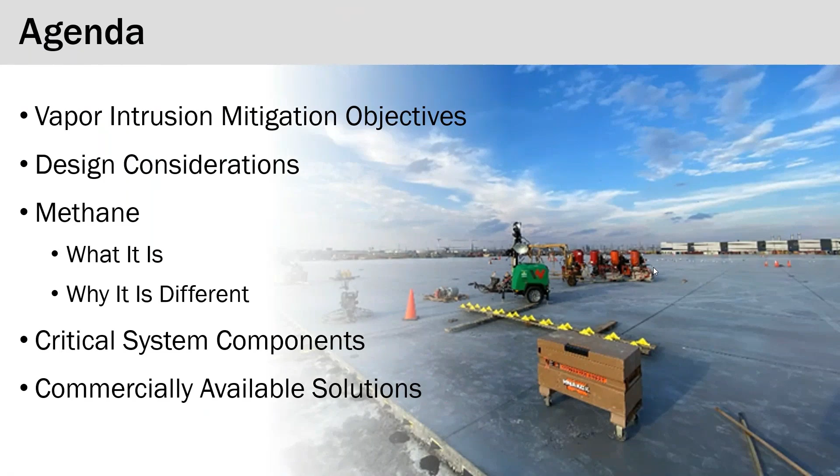We'll look at typical design considerations, and then jump into the heart of the conversation—how methane is different than typical VOCs or radon that might be mitigated, and how we design differently for methane, looking at critical system components. Finally, I'll hand it off to Ryan, who will talk about some commercially available solutions in this space.

So when we're looking to design a vapor intrusion mitigation system, the main objective, obviously, is to protect indoor air and be protective of human health. That's the main objective. But while we're doing so, we also want to consider a few other things, namely constructability, adaptability, and operability.

We could design the best system in the world, but if it can't be constructed, what good does that do us? Similarly, we want a system that's able to adapt with changing site conditions or changes in the building footprint, whether that be during construction or post-construction as part of tenant improvements.

We certainly don't have a crystal ball, but using some best management practices to design systems that can allow for a lot of the most common things that may happen during construction or post-construction. And then finally, operability.

We want a system that's easy to operate, one that's intuitive, and one that allows us to adjust system performance as may be necessary based on changing site conditions. And we're looking at all of this throughout the process of the design, from pre-design through installation.

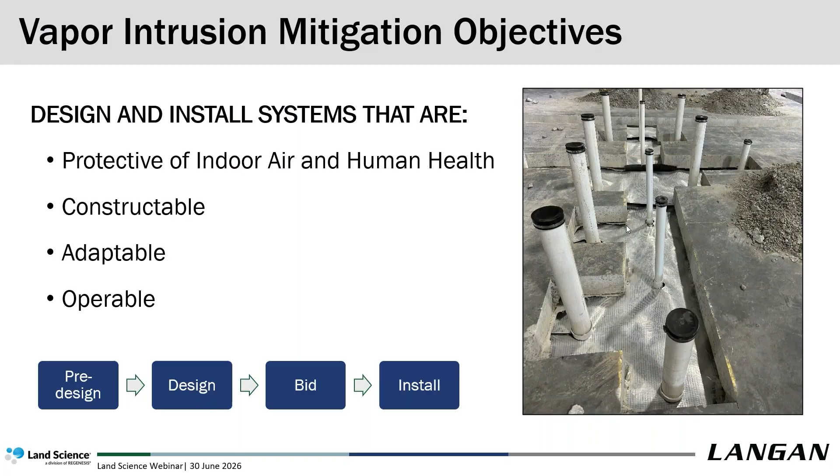When we're looking at designing vapor intrusion mitigation systems, we're looking at several different potential strategies. These strategies can consist of blocking, venting, pressurizing, flushing, or purifying. This is sort of a crude way of describing it, but I'll run through these quickly.

We talk about blocking. It's a physical barrier to vapors making their way into the building, that being vapor intrusion barriers. When we're talking about venting, we're looking at more traditional passive or active sub-slab mitigation strategies where we're preventing or mitigating those vapors from making their way into the building through either passive or active modes of depressurizing the sub-slab environment.

When we talk about pressurizing or flushing, we're looking at ways of modifying the existing or new HVAC systems. Pressurizing means we add a positive pressure to the interior of the building. So as an alternative to depressurizing the underslab, by pressurizing the interior we're mitigating the ability of those vapors to make their way into the indoor air. You could also consider flushing, increasing the air exchange rate within the interior of the building so that we're not allowing any vapors that might make their way into the building from accumulating at a level that's dangerous to human health.

And then finally, air purification is more typically seen in a temporary condition, while a more permanent mitigation strategy can be put in place, but it's still an effective way. This means we're not necessarily preventing vapors from making their way into the building, but more so purifying that air, assuming those vapors are present, creating safe air for the occupants to breathe.

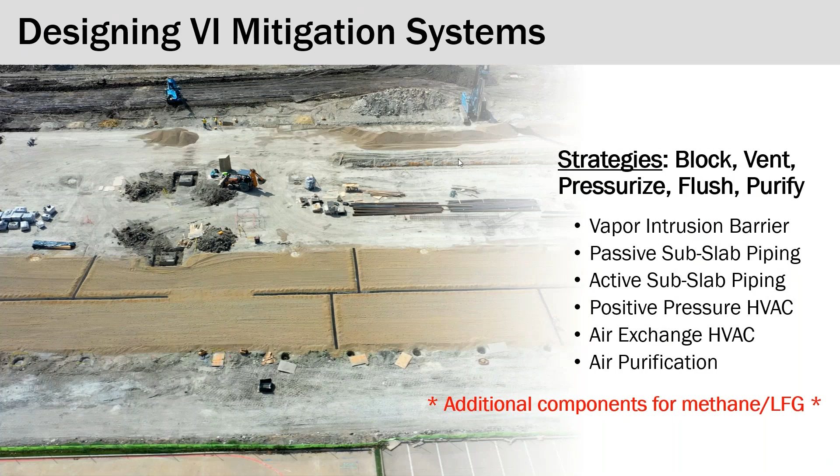Now, these mitigation strategies still apply in the case of methane mitigation, but as we'll talk about in more detail in this presentation, there are certainly additional components that need to be considered when designing a system for either methane or landfill gas mitigation. So again, these considerations are not specific to methane mitigation systems, but mitigation systems in general.

First thing we're going to be looking at are site conditions, and those consist of a number of different things, namely contaminants of concern and the magnitude of those contaminants, in addition to the depth to water. There are a number of other things that need to be considered, but these are the main things at least at the preliminary look. I've got contaminants of concern highlighted here in red because we're going to be discussing one contaminant of concern in particular today, that being methane.

We're also looking at building type and use, in addition to size, looking at the site plan and understanding: is it a cut site, is it a fill site, and how those construction activities might impact the site conditions, contaminants of concern, and the potential for vapors to migrate into the building.

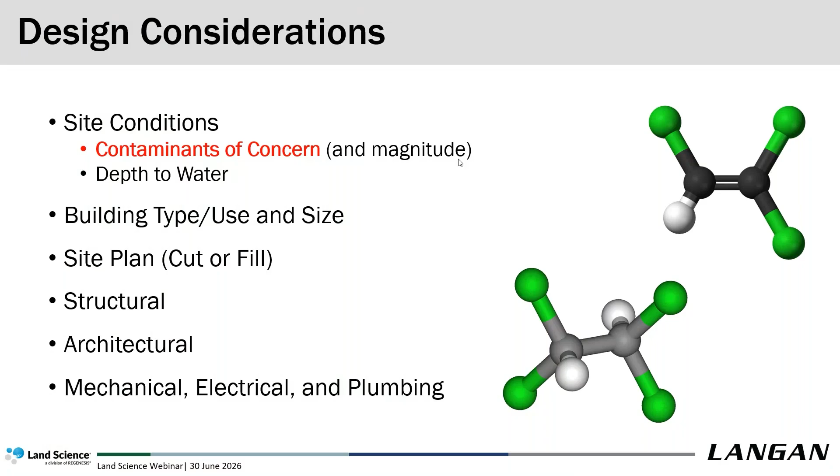We're also specifically looking at the structural, architectural, mechanical, electrical, and plumbing for the building that's to be mitigated. Our mitigation system needs to be designed in conjunction with these elements so that it can be constructible, adaptable, and operable. We want a system that's not going to impact the aesthetic or the functionality of the building we're mitigating. So now that we've run through some of the baseline considerations for mitigation systems in general, I want to jump into methane, talk about what it is and why it's important, and why we're talking about it today.

Methane is a colorless, odorless, and highly flammable gas. The lower explosive limit for methane is 5% by volume, so not a huge concentration. The upper explosive limit is 15% by volume.

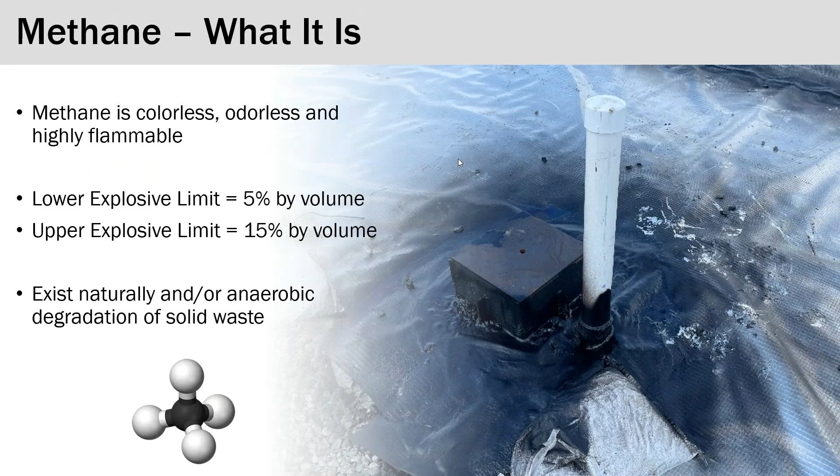Methane can exist at sites either naturally, through naturally existing organic matter such as meadowmat, or through the anaerobic degradation of solid waste in the case of landfills in particular. These are the most common sources that we see requiring methane mitigation systems in land development applications.

So why is methane different than a typical volatile organic compound or radon? One reason is the acute health risk, which comes in the form of the potential for explosions or fires. If methane is present between 5% and 15% by volume, and you've got oxygen, which I would hope you'd have in the building, and you've got an ignition source, you have yourself the potential for fire and explosion.

In addition, as I mentioned earlier, one of the potential sources of methane in land development applications are landfills. And with landfills comes the potential for settlement.

That comes with itself a set of challenges that need to be considered when we're designing a mitigation system. And in the landfill application, there's a potential for other gases or constituents to be present as a result of the landfill, not just methane. We have to understand how those other compounds may impact the functionality of the system and what other precautions need to be taken.

The other thing to consider is that when we're designing a system for radon or other VOCs, our primary objective is to prevent the intrusion of the gases from making their way into the building. However, with methane, there's a supplementary objective, which is to prevent or mitigate the accumulation of methane from beneath the sub-slab. Reason being, we don't want methane to accumulate beneath the slab to a concentration that could be dangerous from an explosion or fire risk.

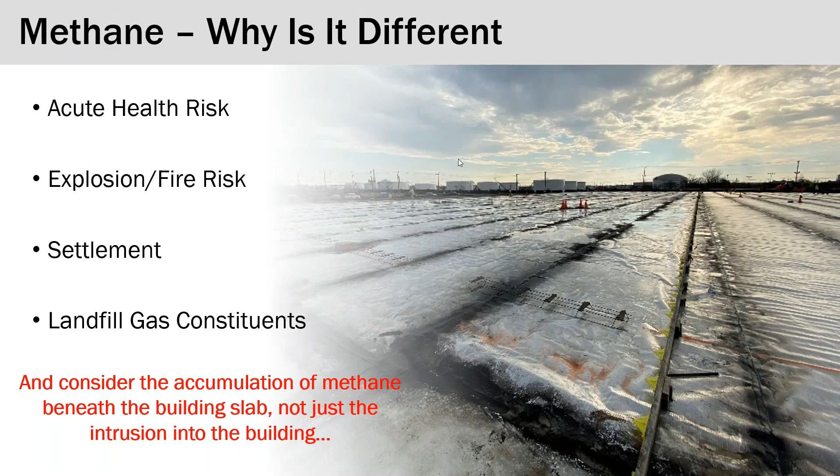Consider in the future if someone were to perform tenant improvements and penetrate the slab, if concentrations of methane beneath the slab were within that 5 to 15% by volume, it could create a very dangerous situation. So, same objective as a VOC system, which is to mitigate intrusion, but we've got that supplementary objective of preventing or mitigating the accumulation of methane beneath the slab.

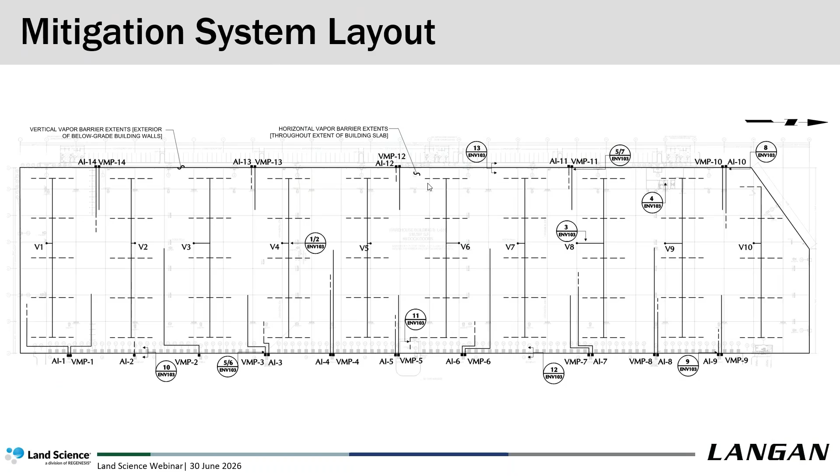As we walk through those critical components, we'll also look at some of the lessons learned when implementing them. I've grouped these critical system components into a couple of key considerations, and we'll walk through these on subsequent slides.

We're looking at the potential for methane gas to migrate, whether beneath the slab or across the site, the potential for settlement, the acute hazard that methane presents, and how we monitor this effectively. And finally, materials of construction—looking at not only the constituents in the gas itself, but also the potential for settlement and migration, and how that factors into particular materials of construction used.

As we'll see on subsequent slides, there's a site-specific basis for all of this, as is typical for any mitigation system. So I don't want to give the idea that all of these components are necessary for every methane mitigation system designed, but I'll do my best to identify instances where they need to be considered.

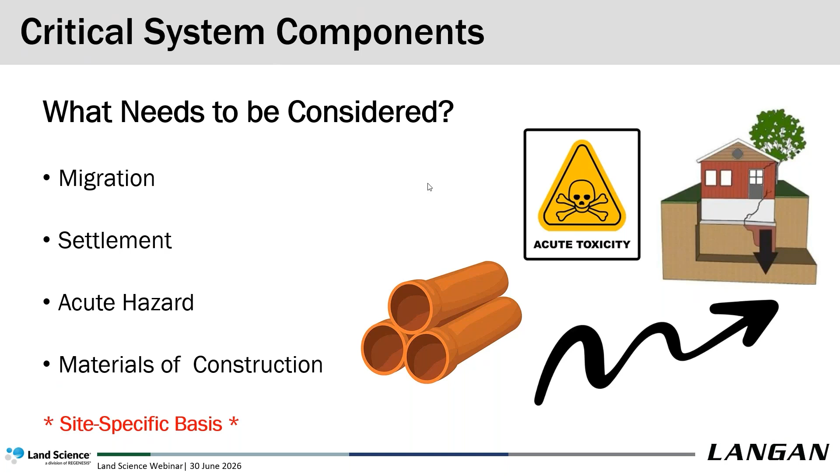The first consideration we'll look at is migration. Similar to VOCs, there's potential for these vapors to migrate beneath the building or across the site. The difference is the acute health concern that methane presents, so it's important that we mitigate or control the migration of methane throughout the building or across the site as much as possible.

Two such components that we typically include in our mitigation system designs are trench dams and seal-off fittings. For trench dams, the idea is that if utilities run across the site, they're typically placed in a high permeability bedding material as part of the utility design. That high permeability bedding material presents a preferential pathway for those gases to migrate.

Particularly when the methane present originates from our site, we want to be mindful that these utilities don't present a preferential pathway for methane to leave the site. Especially in cases of landfill redevelopment, there's a concern that if methane were to use this bedding material or these utilities as preferential pathways, methane could accumulate offsite and people could unknowingly be introduced to elevated concentrations of methane in a dangerous environment.

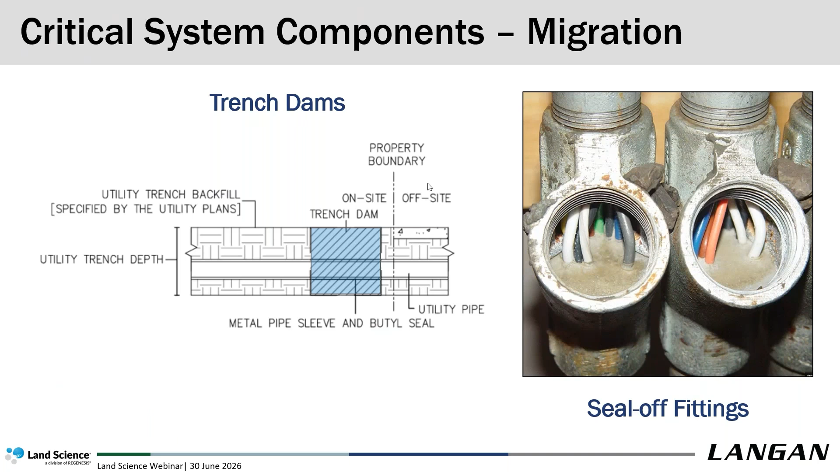I will mention that these are not typical components of a mitigation system. So it's very common, if not discussed upfront with the entire project team during a kickoff, that these items are overlooked and are much more difficult to install after the fact, keeping in mind that while people may be familiar with installing mitigation systems, they may not have seen these elements. Identifying that upfront as part of the process is very important.

The next component to consider is settlement. This is typically associated with land development applications where landfills are present, and it needs to be coordinated with the geotechnical engineer and structural engineer to understand the likelihood or possibility of settlement, and the magnitude of settlement that's anticipated.

But if settlement is anticipated, there are several things that can be included in the design to allow it to continue operating effectively post-settlement. A couple of these include pipe hangers - elements installed prior to pouring the slab that become integral to the rebar and hang in place. So as the slab potentially moves, so too will the piping, preventing potential pipe damage, or to the extent it can, sloping or low points in the piping.

Also, there are flexible joints that can be installed along with different materials of construction. Typically we would see PVC pipe used beneath the slab for a typical mitigation system. HDPE pipe is another potential material of construction that has a bit more flexibility, and will mitigate the potential for pipe damage if settlement were to occur.

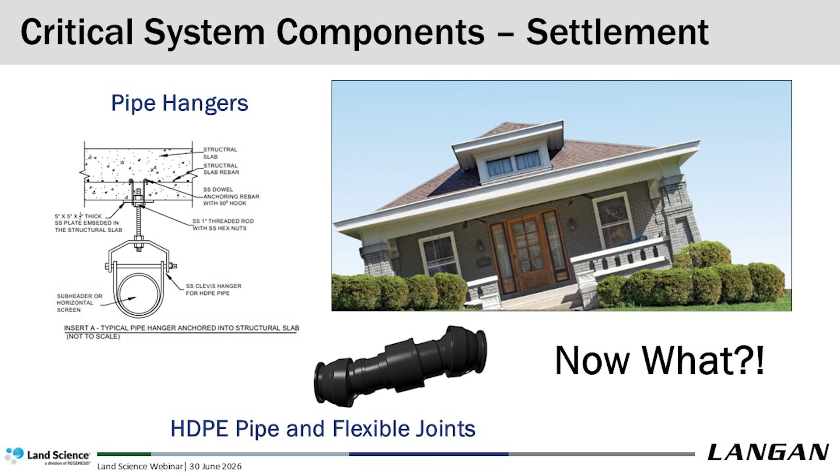The next consideration is acute hazards related to methane. As I mentioned, it has the potential for being an explosive or fire risk. Some ways we can mitigate this, we'll start with indoor air sensors. This is certainly different, not part of a typical VOC-related mitigation system. We would like to think our mitigation system is going to prevent dangerous levels of methane from entering the building and accumulating. However, we want to be sure we're protective of the occupants, and if something were to go wrong with the system, that we're made aware of it. So indoor air sensors are a crucial part of a mitigation system targeted for methane.

These sensors are installed approximately a foot from the top of the ceiling, because methane is lighter than air and will accumulate at the top of the building or ceiling. We typically include several set points to allow us to understand where the concentrations of methane may be and allow folks time to make necessary adjustments to be protective of indoor air. Also, when we're talking about an equipment room where we might have equipment for an active mitigation system, we're typically looking to have a separate HVAC system for that particular room.

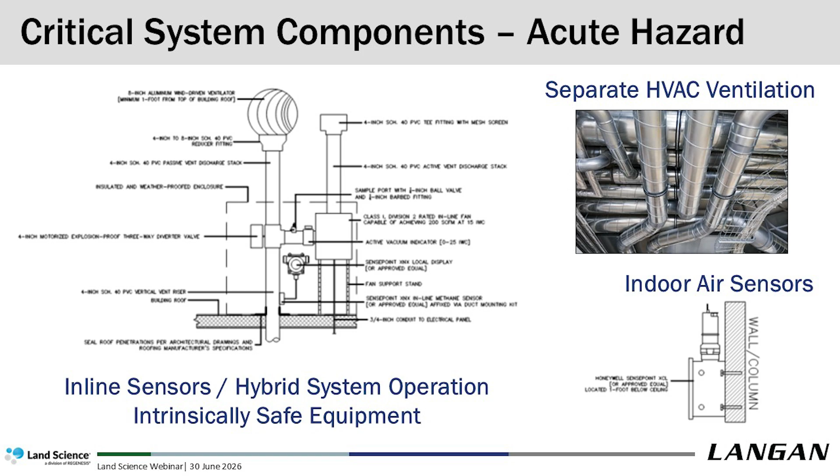Also, whether a hybrid or an active system for methane mitigation, the equipment needs to be intrinsically safe because it has the potential to be moving hazardous, flammable concentrations of methane through the system. Those systems need to be intrinsically safe to be protective. Again, something different than you would see in a typical VOC type system.

As I wrap up the presentation this afternoon, I'd like to run through some big picture takeaways before I hand it off to Ryan.

As was discussed today, while designing methane mitigation systems, the concepts are similar to your typical VOC or radon mitigation systems. There are certain considerations that need to be taken into account in order for them to be protective of the occupants of a building, given that methane presents differently than VOCs and radon.

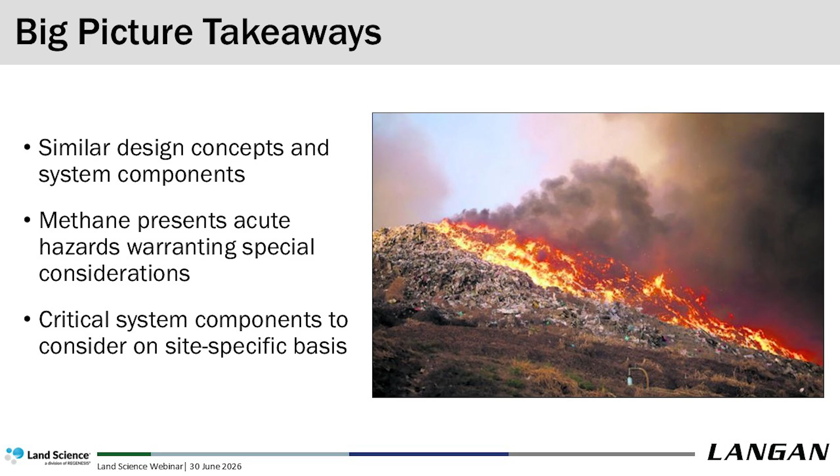Those critical system components need to be considered on a site-specific basis and incorporated throughout the process such that the systems are constructible, adaptable, and operable, and ultimately protective of human health and the occupants of the building. With that, I'd like to thank everyone for their time today. Appreciate it very much. Look forward to answering any questions you folks may have. And with that, I'd like to turn it over to Ryan.

Wrap us up. All right, thanks Matt. So like Matt said, I'm going to transition a little bit here.

You heard what goes into designing a methane mitigation system. I'm going to take a little time to zoom in on one of those pieces, which is the vapor barrier itself. So I'll spend a few minutes focused on the role of the vapor barrier in the methane system's performance.

Specifically how durability and QA/QC can contribute to the success of any given project. So I'll start where we often start here at Land Science. If you've attended one of our webinars, you may be familiar with this, but we often evaluate contaminant vapor barriers by two primary criteria: chemical resistance, the ability of the vapor barrier to block vapors, and what we call constructability.

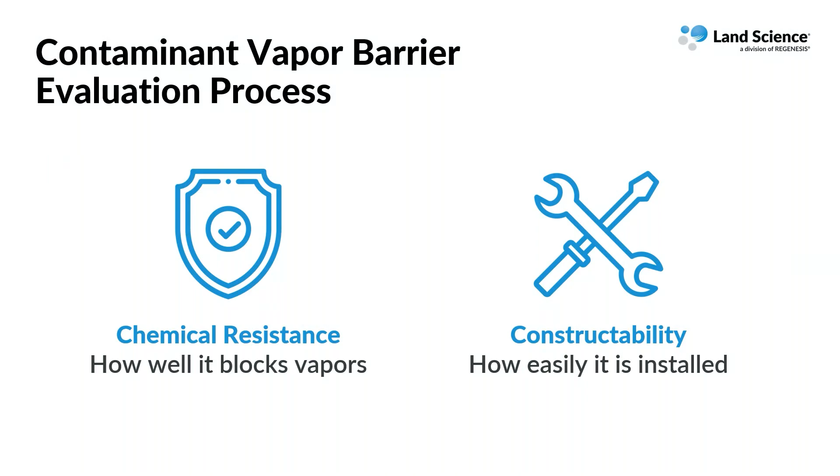So how easily is it installed? How durable is the vapor barrier? The overall quality of the installation. It's really the combination of these two factors that will determine which barrier makes the most sense for any given project you're looking at.

And again, that first part I mentioned, chemical resistance, a lot of us are familiar with this component, and Matt touched on it, making sure you have a vapor barrier that is compatible with the contaminant you're dealing with. In this case, it would be methane.

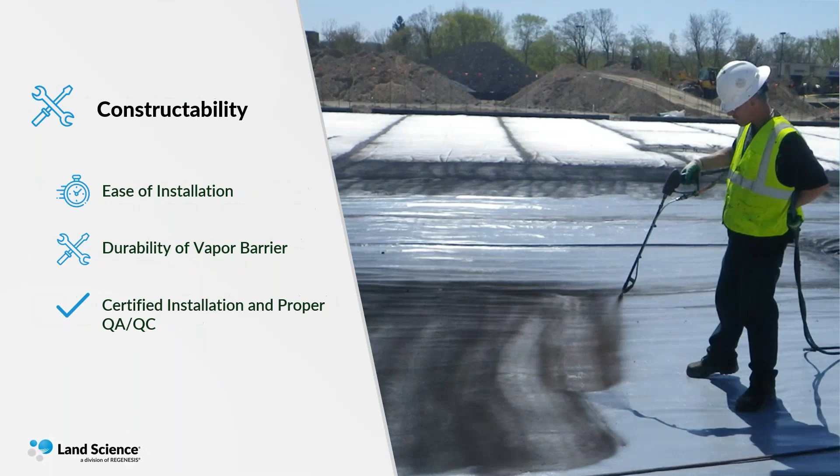Just as important as having a vapor barrier compatible with the contaminants you're looking at, you also want a vapor barrier that is constructible. You could have the most chemically resistant vapor barrier in the world, but if it can't be installed properly, as Matt referenced early in his presentation, what good is it doing you?

So when we're evaluating the overall constructability of a vapor barrier, we're looking at a couple different factors: the efficiency of the application, the ease of the installation, the durability of the membrane, and the measures put in place to ensure a quality installation.

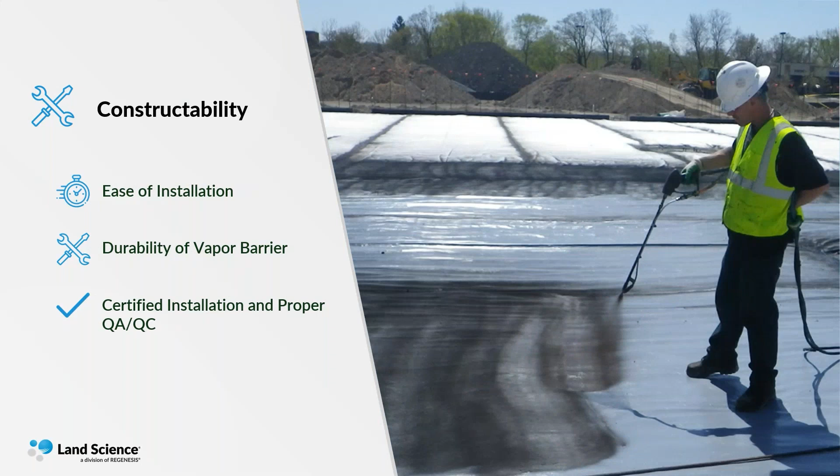I'm going to spend a little bit of time focusing on the durability component of the vapor barrier. We see the term durability used a lot, and it means a couple different things, so I think it would be helpful to double click on what we refer to as durability and why it's important.

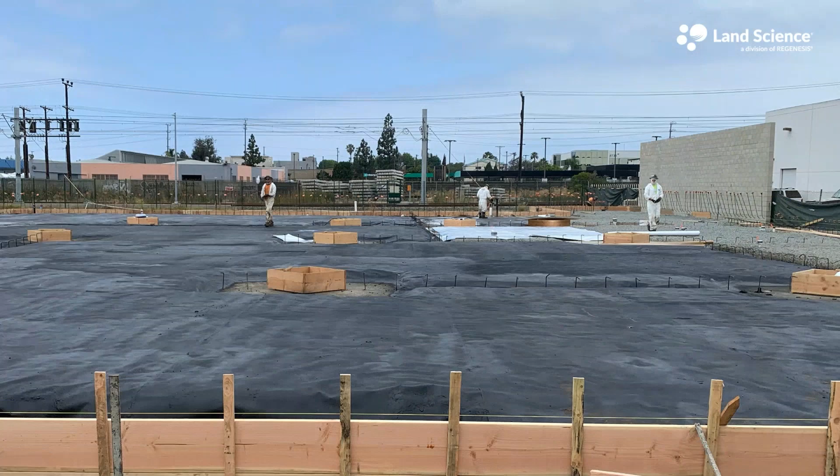Matt showed a couple great photos during his presentation of some projects and installations. Here's another one. The common thing is these systems are being installed at active construction sites, and that's something to keep in mind as I go through this. So the physical properties of the vapor barrier become really, really important.

So if we take a second to think about this question - why does durability actually matter? At the end of the day, the vapor barrier is one of the things separating that subsurface gas from getting into the building. And the unfortunate reality is it's getting installed during a very abusive environment.

An active construction site - the vapor barrier is getting placed over stone, people are walking on it and working on it, it can be penetrated from time to time, it's then covered and really never seen again. So once it's installed, we don't get a second bite at the apple. Durability becomes a very key part to that.

A lot of people translate durability to mean thickness, and that is true to an extent, but durability also combines how the material handles stress, how it handles potential damage, and how it performs at its weakest points - the seams and the penetrations.

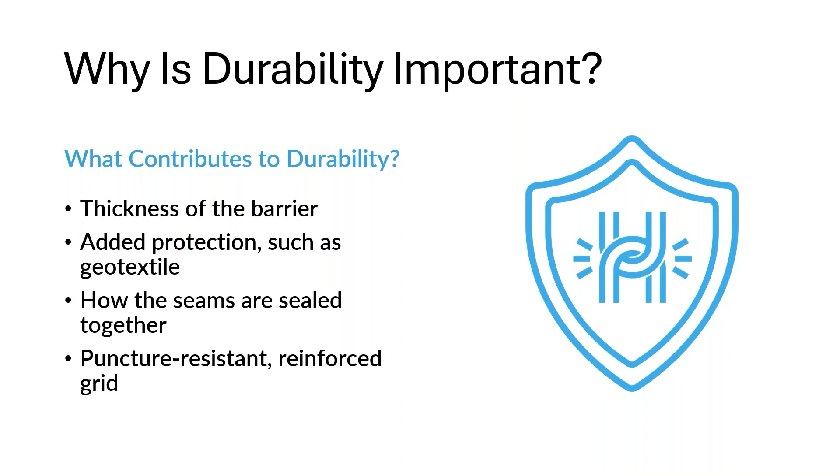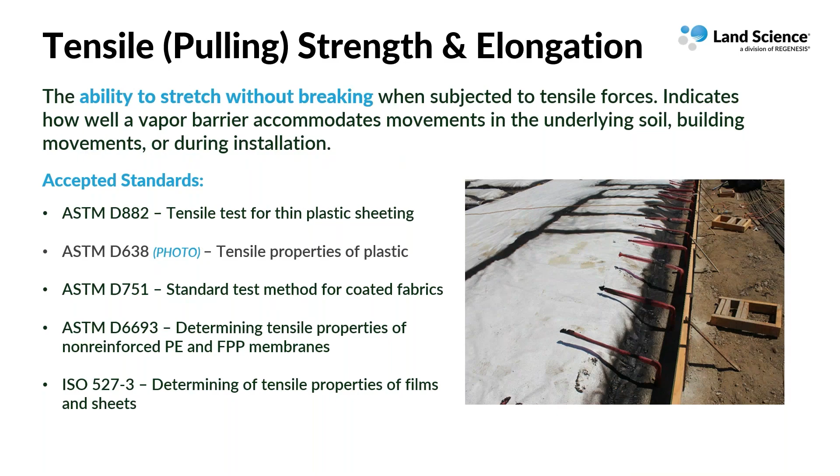If we look at some of the physical properties built into durability, tensile strength and elongation are two important ones to be looking at. They tell us how a material will behave when it's stressed. Can it stretch without breaking? Can it handle movement - soil or slab movement, construction activity - because movement is going to happen either during installation or over the lifetime of the building.

You also have puncture resistance - the ability of the material to withstand damage or penetration. You see these guys working on the vapor barrier installation in this photo. You can imagine them working with rebar, carrying tools, things getting dropped on the vapor barrier or dropped and then dragged a little bit. So puncture resistance is another really important physical characteristic to be looking at when evaluating a vapor barrier for any given project.

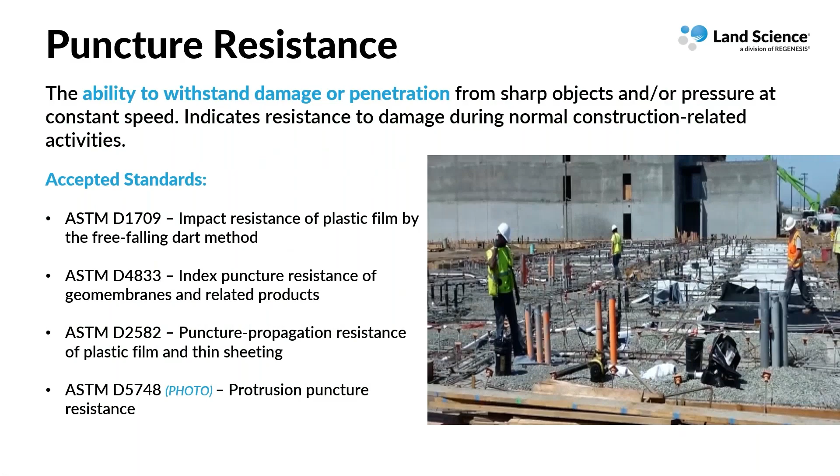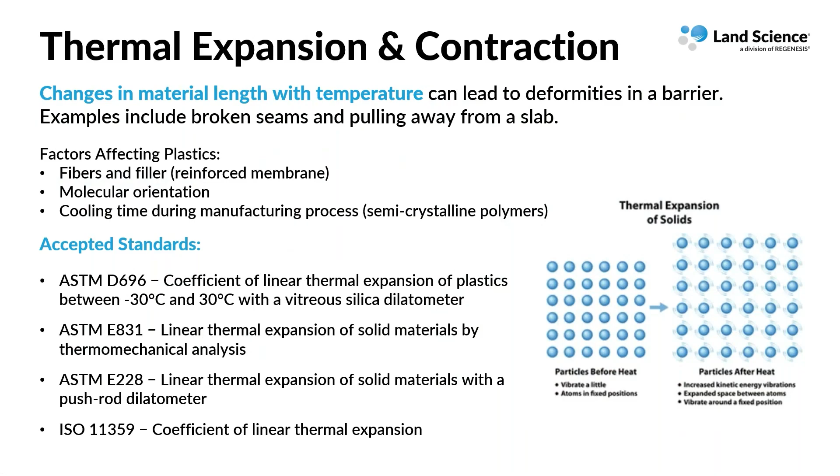Another physical property characteristic that is often overlooked, but it does happen, is thermal expansion and contraction. If you can imagine a vapor barrier being installed - it's seamed, terminated at the building edges - and if that vapor barrier is sitting out for a day with the sun hitting it and it's not covered, certain vapor barriers will contract and bust at the seams and pull off the walls, and all of those areas need to be redone and resealed. So something to consider when looking at different vapor barriers on certain projects is the idea of thermal expansion and contraction.

To summarize some of these physical characteristics - tensile strength, elongation, puncture resistance - they all play a really important part in the performance of a vapor barrier. One thing I'll note is that the ASTM methods for these physical properties are not all the same; they are very specific to the material being tested against. So there is not one correct method for puncture resistance. If you look at technical data sheets on a number of different vapor barriers, you're going to see a lot of different ASTM methods, and that's because the method is specific to the material.

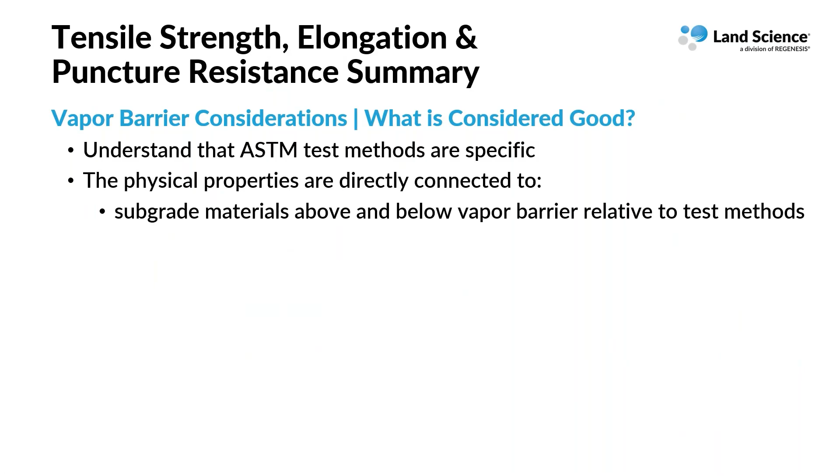Another thing to keep in mind, reiterating the point here, is that physical properties are directly related to things that are happening - the subgrade materials above and below the vapor barrier, the rebar or other trades working on and around that vapor barrier, the concrete pours, the trucks that may be on top of the vapor barrier after it's installed, potential differential settlement, which Matt did a really nice job outlining. All of these things play a factor in why the physical properties are so important. The takeaway here is that there really is no one-barrier-fits-all scenario.

You should be looking at the contaminants that you have at your site, the concentrations that are at your site, and what the building is going to be. Is it a corner gas station that's being turned into a convenience store? Is it a large logistics warehouse? The vapor barrier selected for those sites may be different.

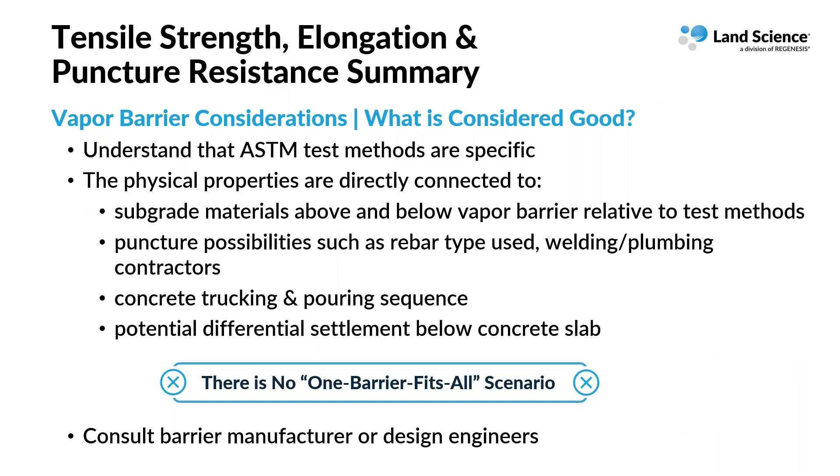Consult us as the vapor barrier manufacturer, consult Matt as the design engineer. We have a lot of knowledge and we see a lot of projects, and we can use that expertise to help guide certain decisions.

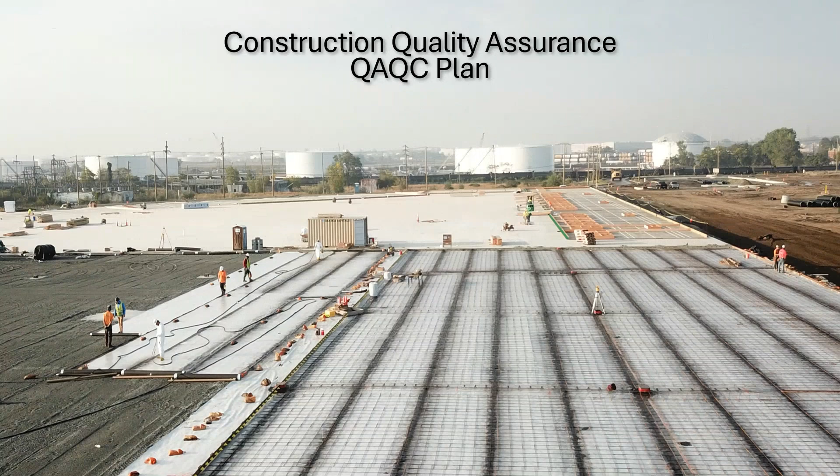So just to take it a step further, how do we ensure a vapor barrier that we selected, after reviewing some of those important physical properties, is actually installed properly? That's by following a CQA, construction quality assurance, or a QA/QC plan.

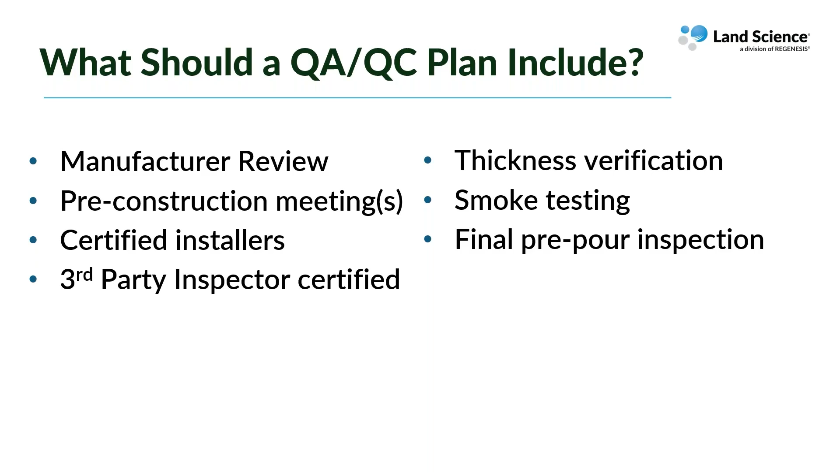This plan should include a number of things: manufacturer review, pre-construction meeting, certified installers, a third-party inspection, thickness verification of the vapor barrier during installation, smoke testing during installation, an inspection before the concrete slab is poured, and being on site during the concrete placement. So there's a lot that should be included as part of a robust QA/QC plan.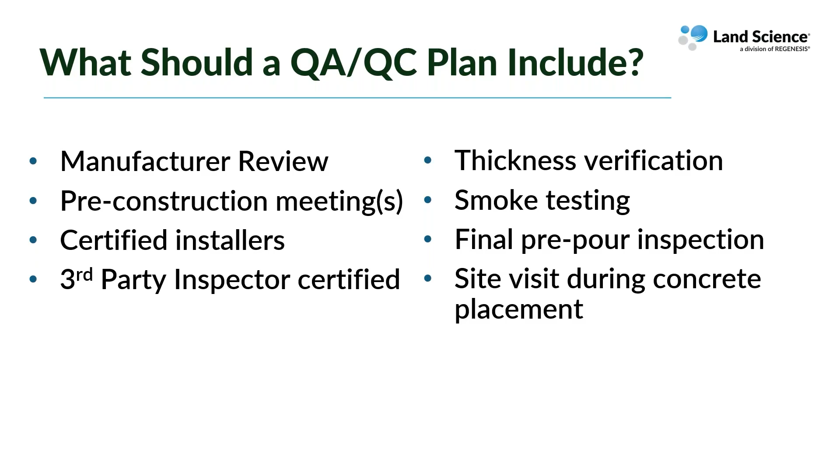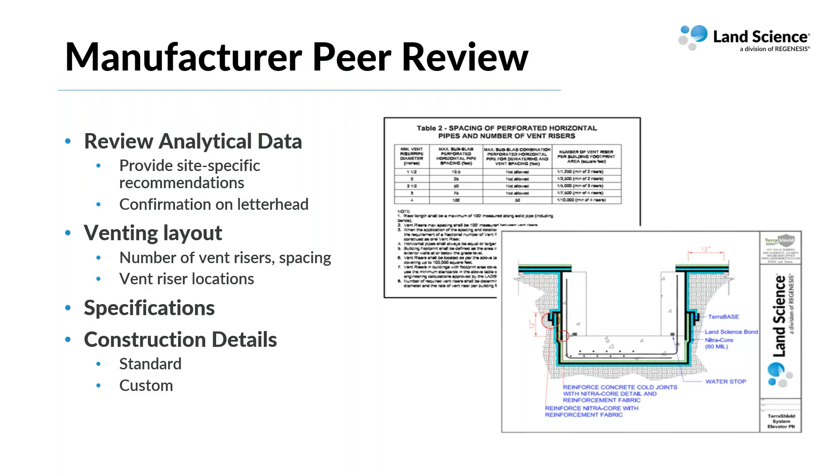When I say manufacturer peer review, that could be anything from helping lay out the venting to creating custom construction details. This goes back to what I was just saying - take advantage of the historical knowledge and expertise that the project team can bring to the table.

Pre-installation meetings, in my experience, are one of the best things you can do to ensure success in the field, and oftentimes it gets skipped. Getting together the project team - whether that's the general contractor, the vapor mitigation installer, the design engineer, manufacturer's rep, the whole project team - if you can get them on site or at least on a call, it will help clear up responsibilities, scope, or contingencies, which is a big one. If weather impacts the schedule, what are the contingencies in place? Getting all of this out before people are in the field is such an important step.

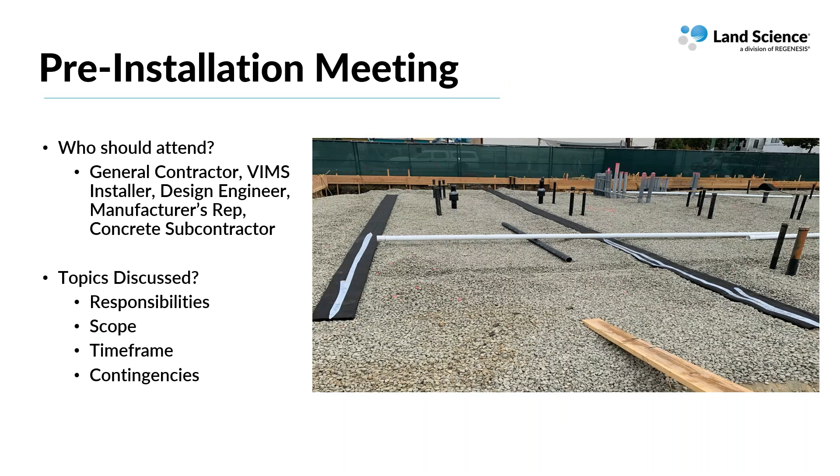As is using a certified installer. Experience matters, training matters, VI knowledge matters. If you are having a site contractor or a concrete subcontractor install your vapor barrier, their number one priority is the other scope - the site work or the concrete. When you have a certified installer on site, their number one priority is the installation of the mitigation system.

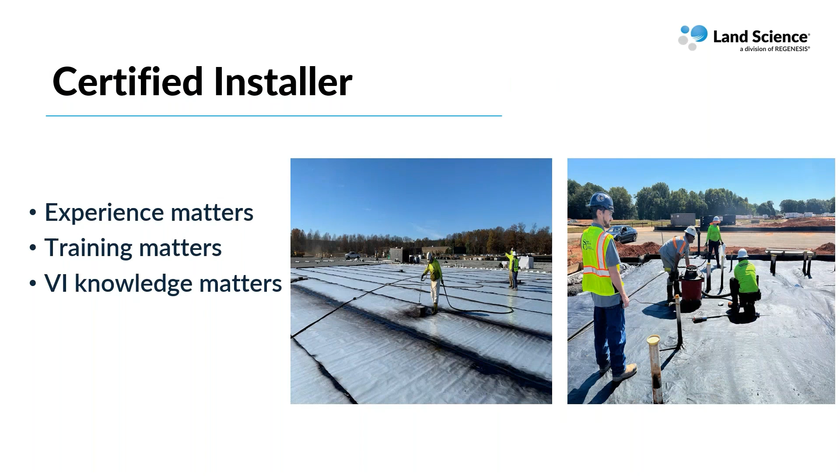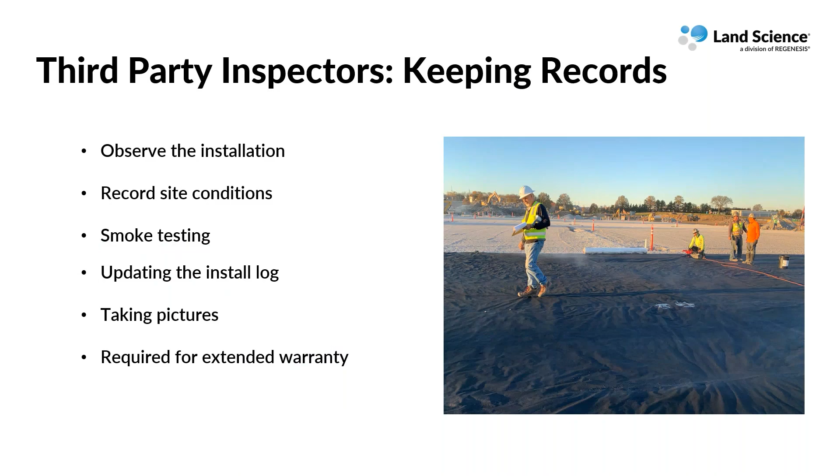Having a third-party inspector on site is really important for someone else to be there to just observe the installation, record site conditions, be involved in the smoke testing or the thickness verification, and take pictures. These are really important things that should be documented and then plugged into some report so that there is documentation after the fact if there is an issue.

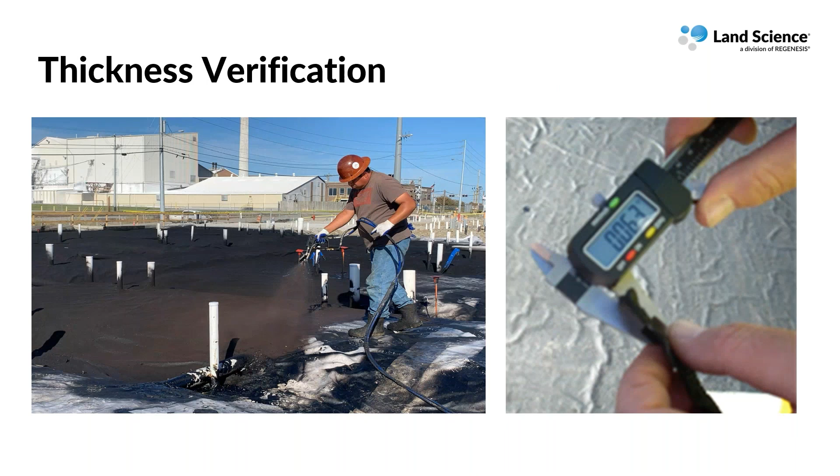I've mentioned thickness verification a number of times. This is specifically when installing a composite vapor barrier system. So if a composite vapor barrier system is designed to be 30 mil, 40 mil, or 60 mil thick, whatever it may be, as the material is being sprayed out, you can cut a coupon out of what is installed and measure the thickness in real time. So if it's less than what is designed, you need to come back and spray more. It's a really good way to verify the right thickness is being applied.

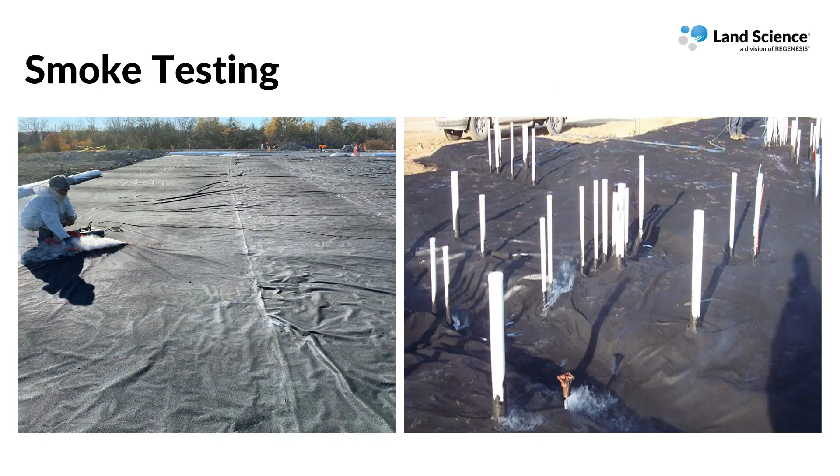Smoke testing is also, in our eyes, an absolute requirement. There's really no better way to confirm that you have a vapor tight seal than conducting a smoke test. In the photo on the left, the gentleman is sending smoke underneath the vapor barrier, and in the photo on the right, you can see some smoke coming out around the penetration. So in this scenario, we don't have a vapor tight seal, which can be common. But the huge benefit of doing a smoke test is you can see this in real time, come back, make the repairs, do another smoke test, and confirm that you have everything effectively sealed.

So I'll wrap it up here with a couple takeaways. No matter what vapor barrier system you're installing, ensure that you have a QA/QC plan in place. It doesn't need to check off every single one of those components I just mentioned, but having a majority of those things in place will really help the success of a project. And make sure that it's project specific - the convenience store at a corner gas station is going to look different than a large warehouse, and the QA/QC plan may reflect that.

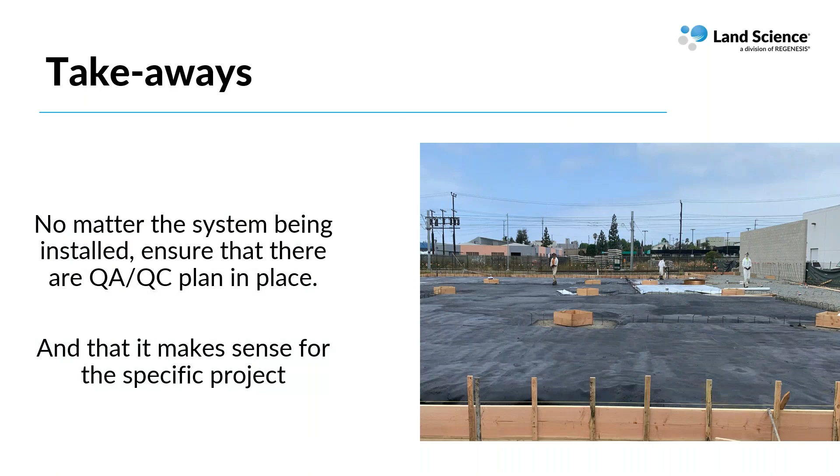A poorly installed vapor barrier really defeats the whole thing. I think that's obvious when you say it, but constructability is equally as important as chemical resistance. Going back to the initial slides, you really have to balance the combination of both of those things to make sure you have an effective vapor barrier.

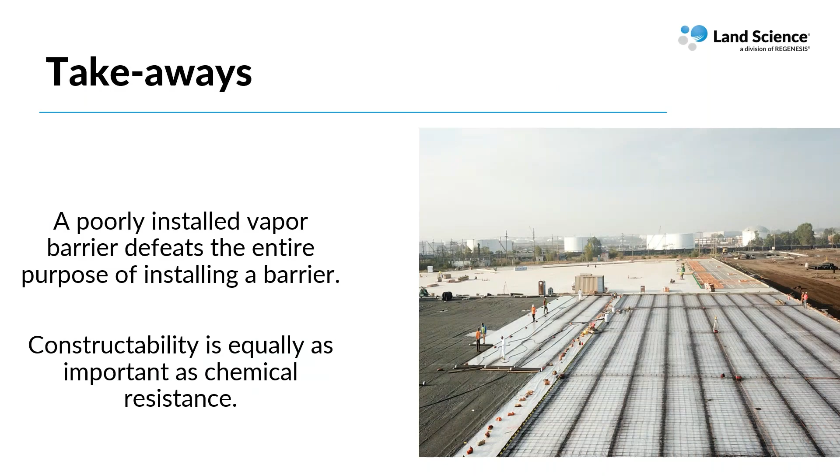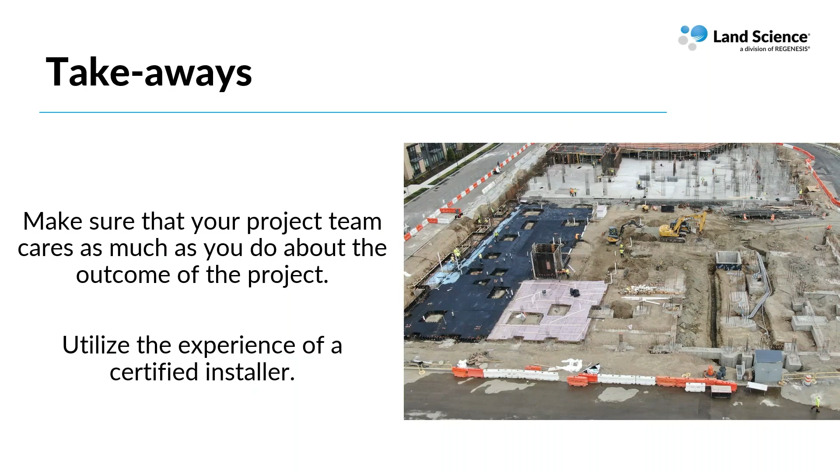Make sure your project team cares as much about the outcome of the project as you do. That leads into utilizing the experience of a certified installer. They're there for a very specific reason, to install a vapor mitigation system successfully, and you should be utilizing that experience.